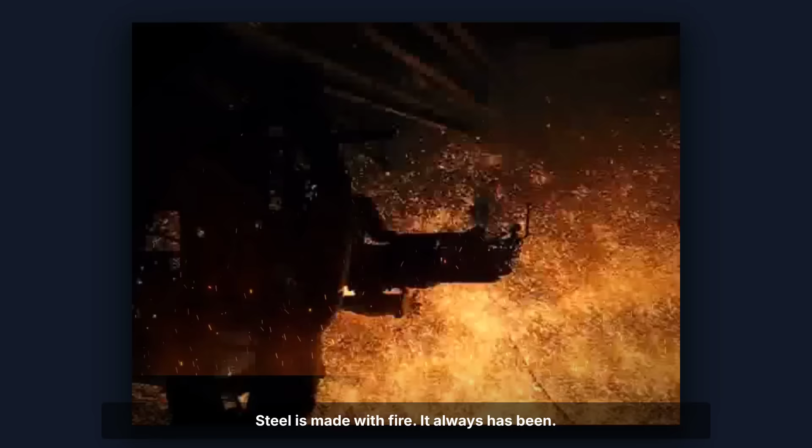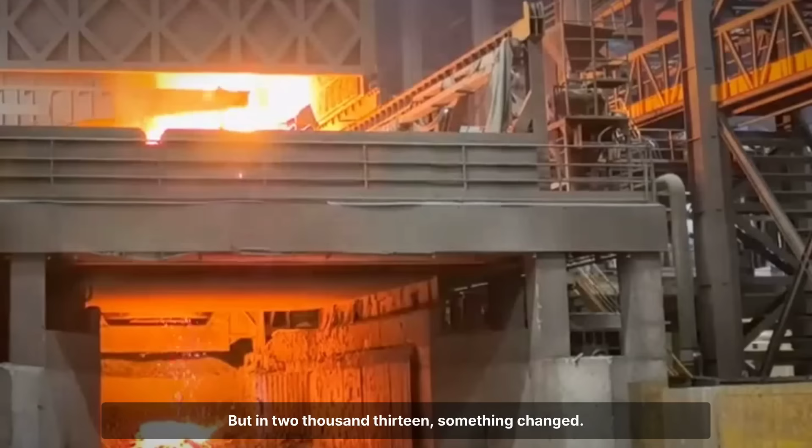Steel is made with fire. It always has been. Fire so hot it liquefies rock. It produces more carbon dioxide than almost every country on Earth. Only China and the United States emit more. But in 2013, something changed. We figured out how to make steel without fire.

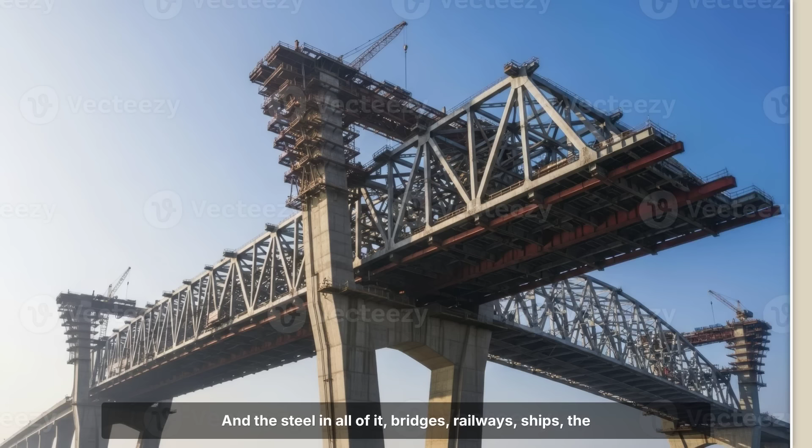Your phone was designed by algorithms. Your car was assembled by robots. The satellite that tells you where you are was launched on explosions calculated to 17 decimal places. And the steel in all of it, bridges, railways, ships, the rebar inside every building, was made the same way it was made in 1300.

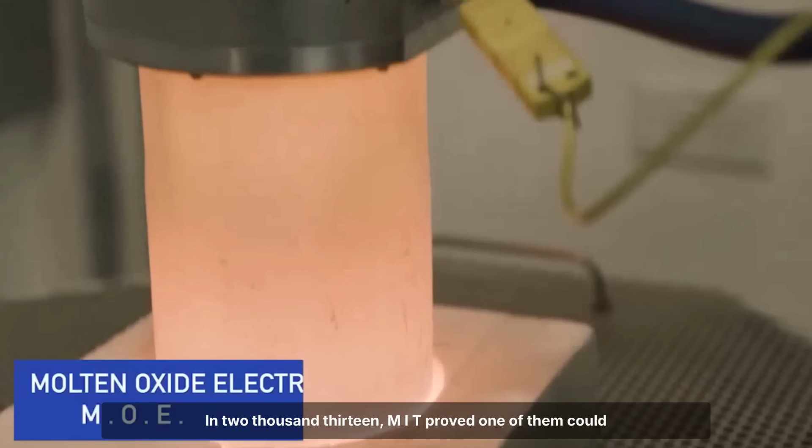Researchers had theorized an alternative for decades. In 2013, MIT proved one of them could actually work. And you've probably never heard of it. You just need electricity. That's it. But to understand why that's such a big deal, you need to understand what electricity is actually replacing.

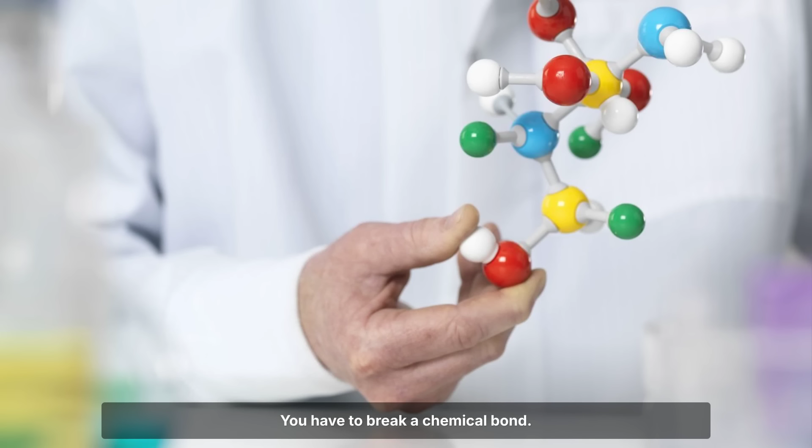This is iron ore. It looks like rock because it is rock. Reddish, heavy, dull. The iron inside is not buried in there like a coin in a jar. It is chemically bonded to oxygen. Iron and oxygen are locked together so completely that you cannot dig it up and melt it. You have to break a chemical bond. You have to divorce the iron from the oxygen. And that divorce is what has defined metallurgy for 3,000 years.

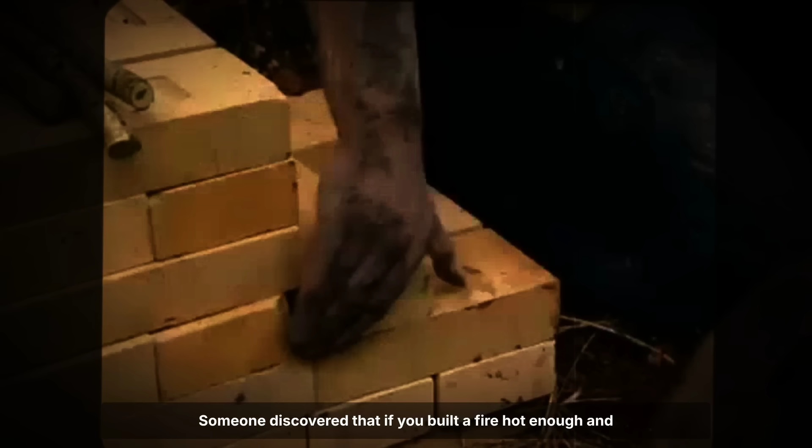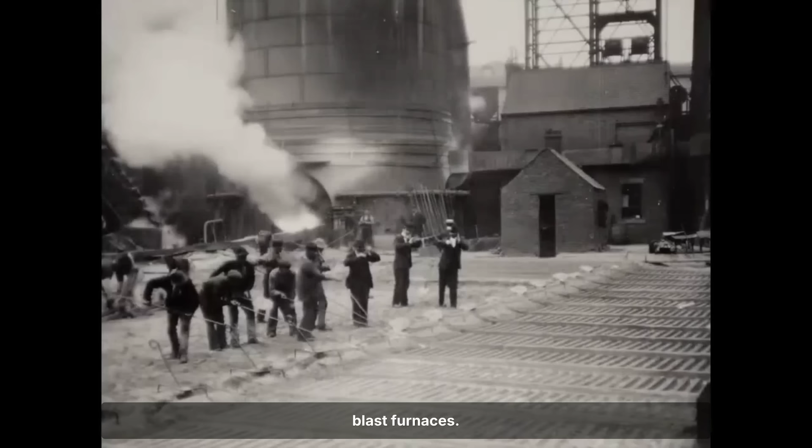Someone discovered that if you built a fire hot enough and packed the right kind of rock around it, something remarkable happened. Metal appeared, liquid, glowing, heavy, pooling at the bottom of the fire pit. Medieval craftsmen scaled the early furnace into the first blast furnaces. The Industrial Revolution multiplied them across continents, but the fundamental transaction never changed.

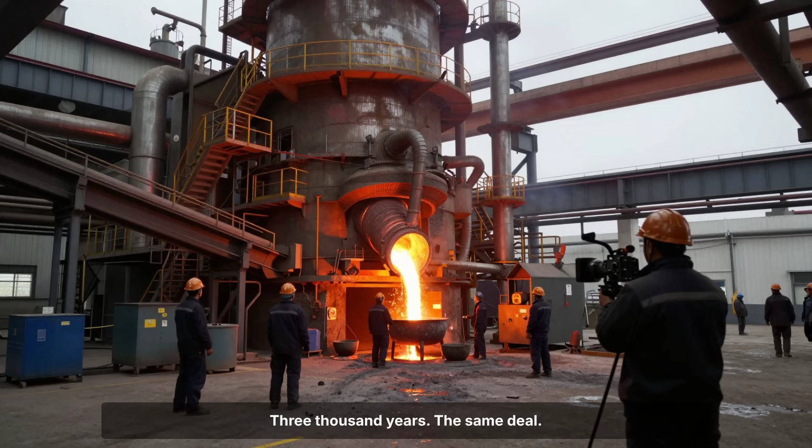You give fire carbon. Carbon steals oxygen from the ore. You get metal. You get carbon dioxide. Every sword, every bridge, every railway, every skyscraper. 3,000 years, the same deal. Nobody questioned whether it was necessary. Nobody had proven a way around it.

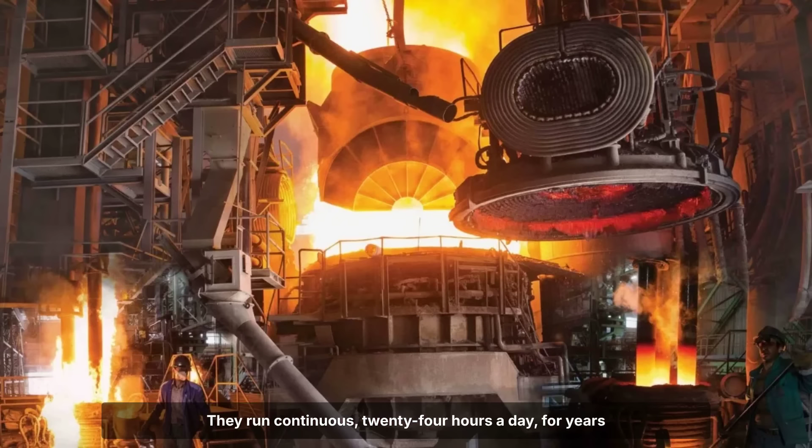The modern version is the blast furnace, 12, 15, sometimes 20 stories tall. They run continuously 24 hours a day for years without stopping. You cannot turn them off. The thermal mass alone would crack the structure. Some have been burning without interruption for over a decade.

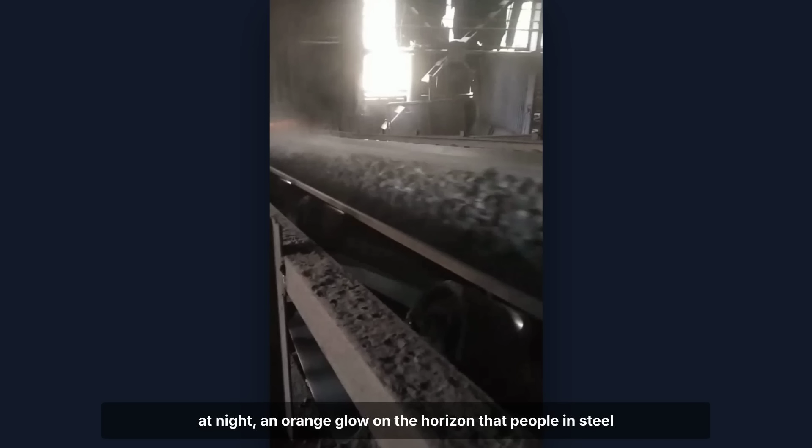The heat inside is so intense it is visible from miles away at night. An orange glow on the horizon that people in steel towns have lived beside their entire lives without thinking much about what it means. Iron ore goes in the top. Coke, which is coal stripped down to a near pure carbon skeleton, goes in with it. Air blasted in at nearly 1,200 degrees Celsius ignites the coke.

It releases carbon monoxide, which rises and reacts with the iron oxide. The oxygen gets stripped away, liquid metal falls to the bottom, carbon dioxide rises out of the top, millions of tons of it per plant, per year.

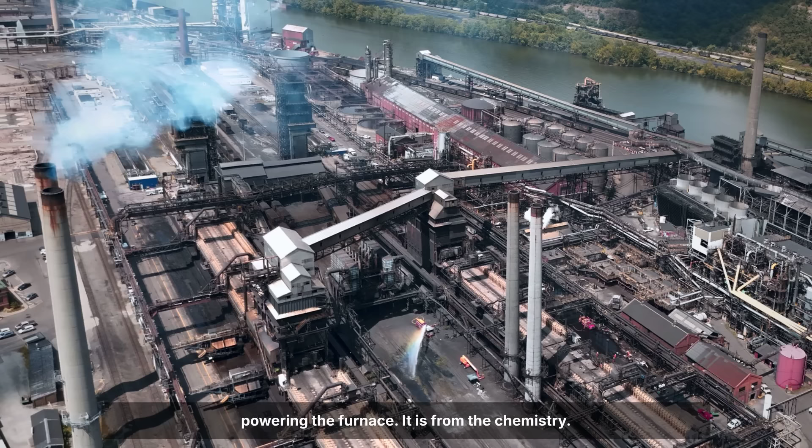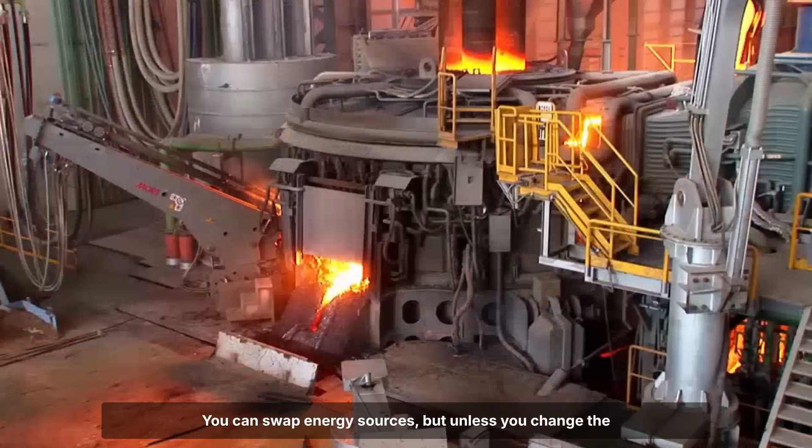Here is what matters: that carbon dioxide is not from powering the furnace, it is from the chemistry. Carbon is not just the fuel, it is the reactant. Without carbon, the oxygen goes nowhere, the metal stays locked in the rock. You can swap energy sources, but unless you change the reaction itself, the carbon dioxide problem stays.

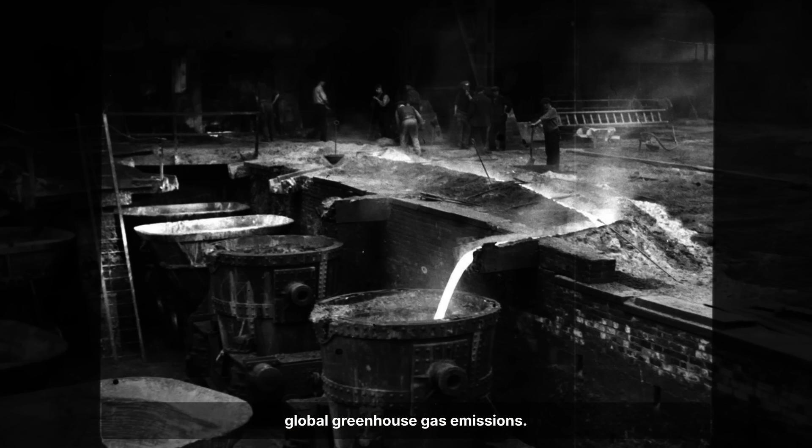The steel industry produced 1.9 billion tons of steel in 2024. Making it generated around 4.1 billion tons of carbon dioxide equivalent, roughly 7 to 8% of global greenhouse gas emissions. For 200 years, we assumed that was just the price of metal. That assumption rested on something nobody stopped to question.

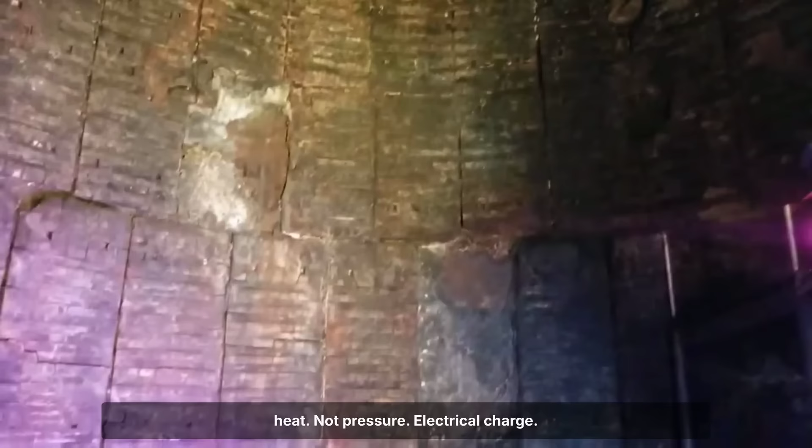What is actually holding the iron and oxygen together? Not heat, not pressure. Electrical charge. At its core, this is not a heat problem, it is a bond problem. Iron oxide is held together by electromagnetic attraction. The iron atoms carry a positive charge, the oxygen atoms carry a negative charge.

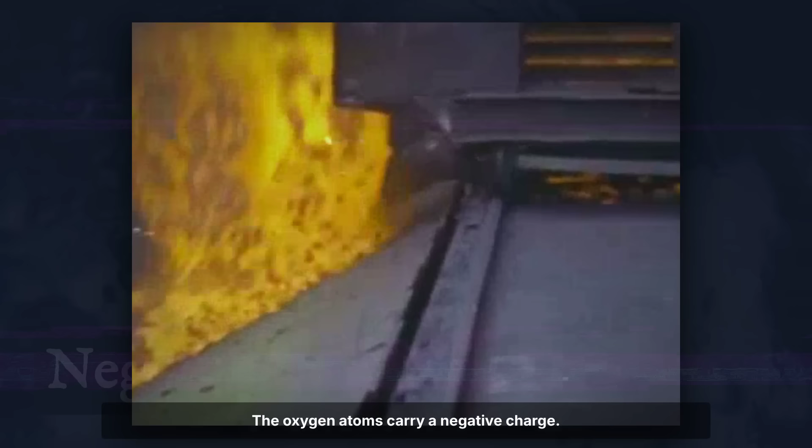When you run a blast furnace, you're using carbon monoxide as a chemical crowbar, a molecule so hungry for oxygen that it steals oxygen away from the iron. That works. It has always worked. But it produces carbon dioxide when the crowbar does the job.

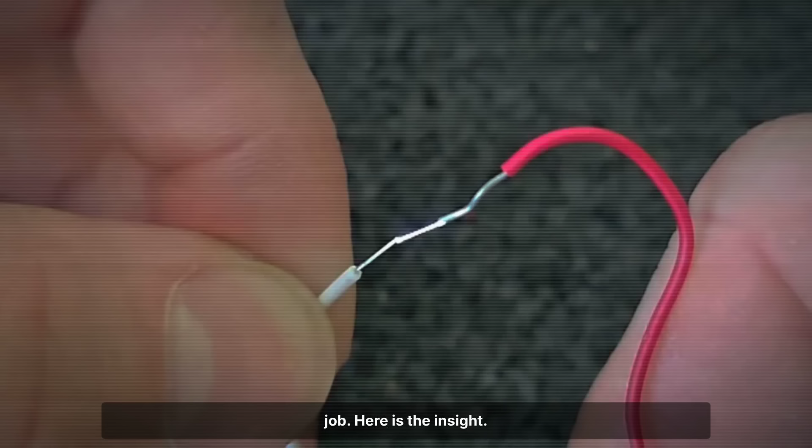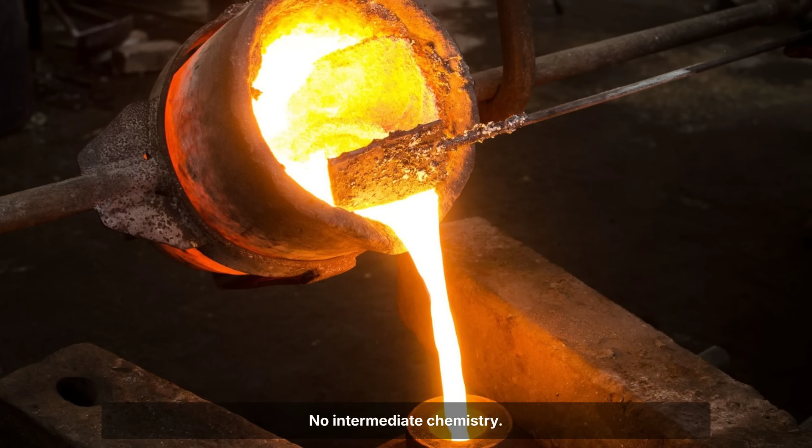Here is the insight. If the bond is electrical, you do not need a chemical crowbar. You can use electricity directly. Apply a current and the charged particles move on their own. Oxygen goes one way, iron goes the other, no intermediate chemistry, no carbon dioxide.

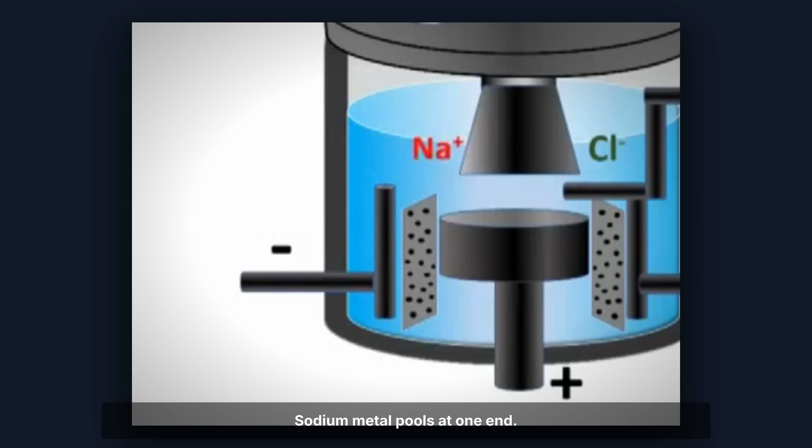Here is an analogy. Take ordinary table salt, sodium and chlorine locked together. Melt it, drop 2 electrodes in, run a current and the bond breaks. Sodium metal pools at one end, chlorine gas bubbles off the other. Not because you added a chemical, but because you applied electricity to something held together by electrical attraction. This is not hypothetical, it is how sodium metal has been produced industrially for over a century.

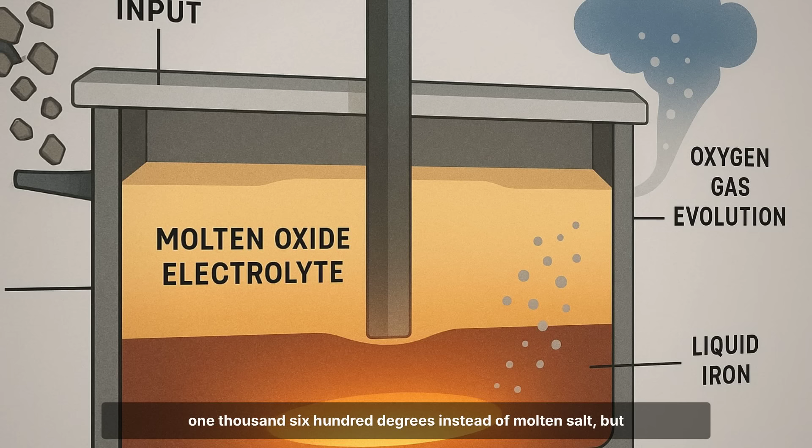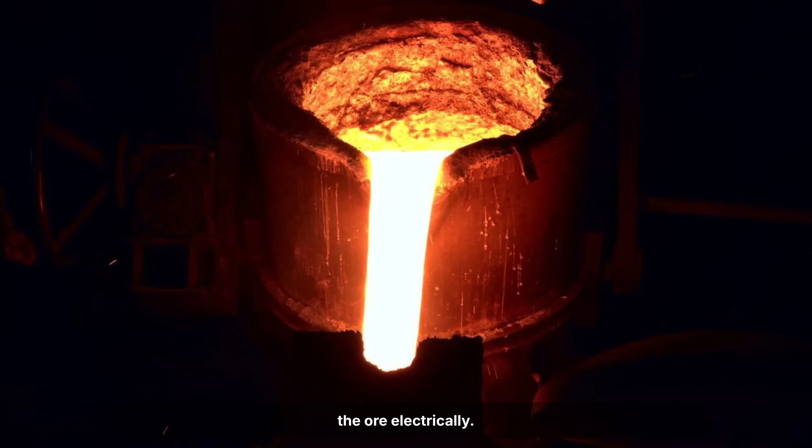That is electrolysis. The environment for iron is far more extreme. Liquid rock at 1,600 degrees instead of molten salt, but the logic is identical. In 2013, MIT proved it works on iron oxide. The process is called molten oxide electrolysis. You melt the ore electrically, it becomes a liquid mineral soup, extremely hot, extremely reactive, electrically conductive. You run a direct current through it.

The positive electrode draws the oxygen out, it bubbles off the surface as pure oxygen gas, visible, physical, gone. Watch it happen in the lab and it looks almost unremarkable. Small bubbles rising through glowing liquid. No roar, no flame, no column of exhaust climbing into the sky, just bubbles.

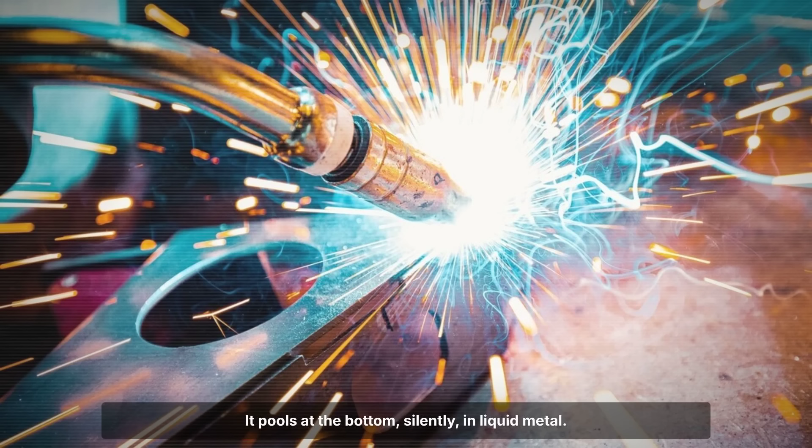The negative electrode draws the iron. It pools at the bottom silently in liquid metal. The heat comes from the electricity itself. The current that splits the bond also heats the melt. No combustion required. In a blast furnace, ore goes in, metal comes out, carbon dioxide goes into the atmosphere.

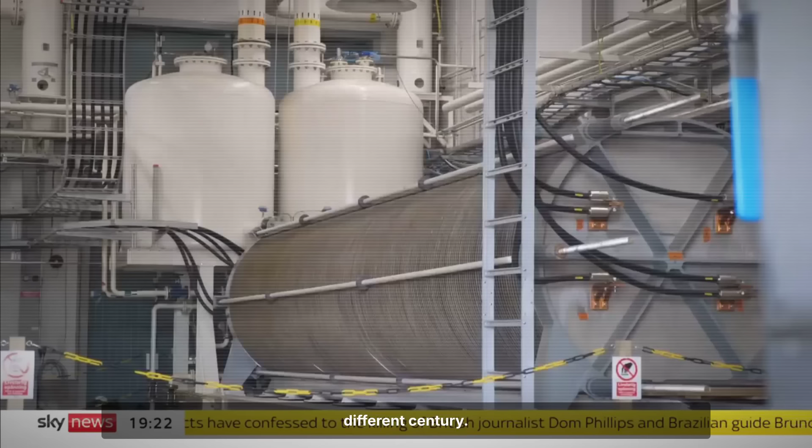In molten oxide electrolysis, ore goes in, metal comes out, oxygen goes into the atmosphere. A different byproduct, a different century. Hydrogen-based reduction is also being pursued, and it is currently ahead commercially, with plants already delivering hydrogen-reduced steel to manufacturers.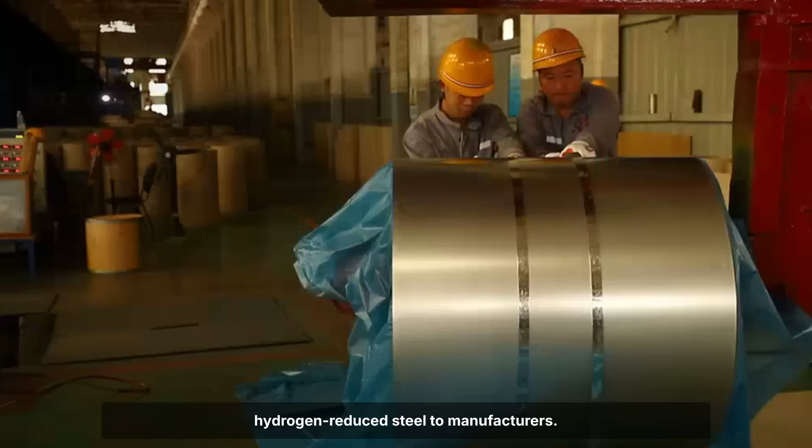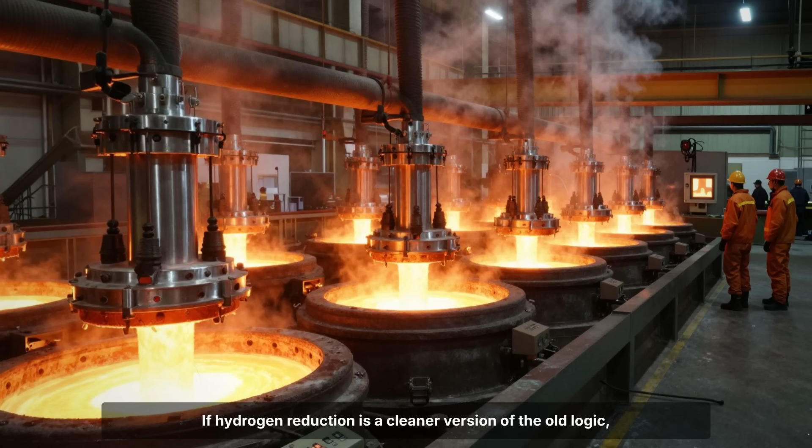But hydrogen still uses chemistry to remove oxygen. Molten oxide electrolysis skips chemistry entirely. If hydrogen reduction is a cleaner version of the old logic, molten oxide electrolysis is a different logic altogether. To understand how we got here, you need to know about Donald Sadoway. Sadoway is a materials scientist at MIT.

He spent roughly 16 years teaching the university's introductory solid-state chemistry course, hundreds of students at a time and eventually over half the freshman class in a single section. Bill Gates came across the lectures through the MIT OpenCourseWare initiative and emailed Sadoway directly to ask for a meeting and to discuss the research. Sadoway initially ignored the message, assuming his account had been hacked by pranksters at MIT. It was not. Gates called his lectures the best chemistry lessons anywhere, but teaching was not the work.

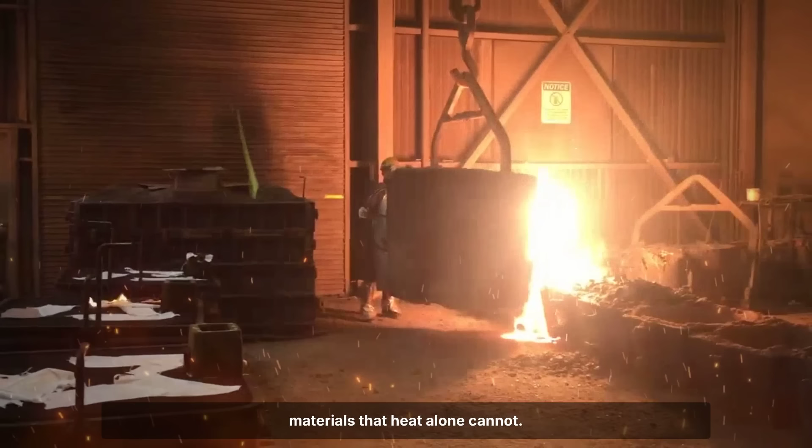The work was electrochemistry, what electricity can do to materials that heat alone cannot. His earlier research focused on liquid metal batteries, grid-scale energy storage built from layers of molten metal and salt. That work gave him an intuition most metallurgists did not have, that separating metals from their ores was fundamentally an electrochemical problem, not a thermal one. The insight sounds simple in hindsight.

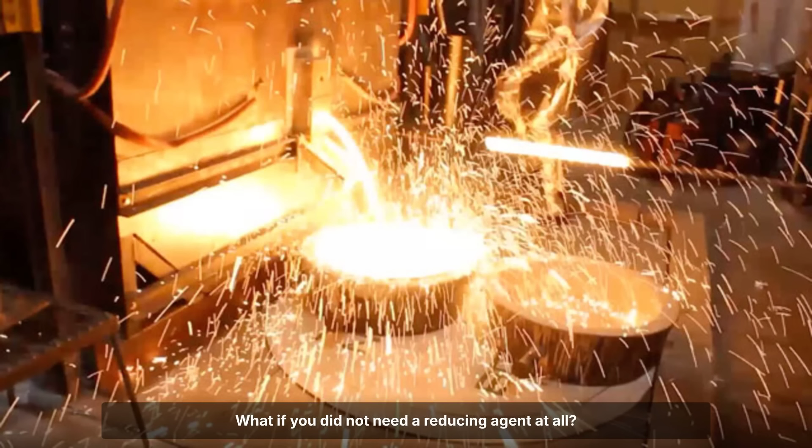It was not. For a century, the assumption in steelmaking research was that decarbonizing the process meant finding a cleaner source of heat or a cleaner reducing agent. Sadoway's group asked a different question. What if you did not need a reducing agent at all? That question led to years of work on a problem that sounds deceptively simple. What do you make the electrodes out of?

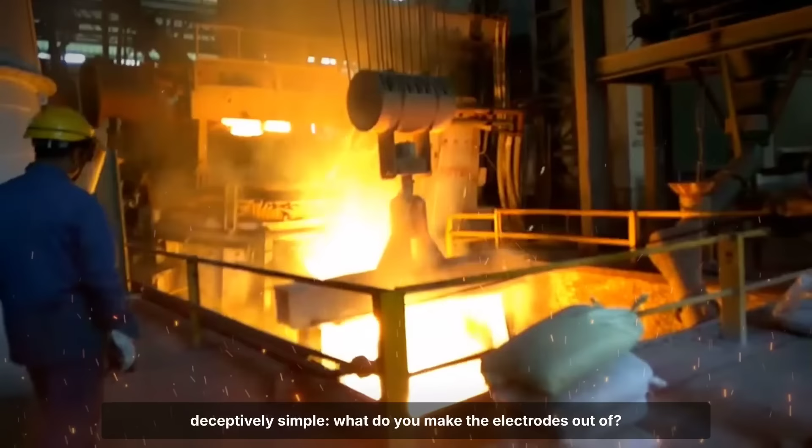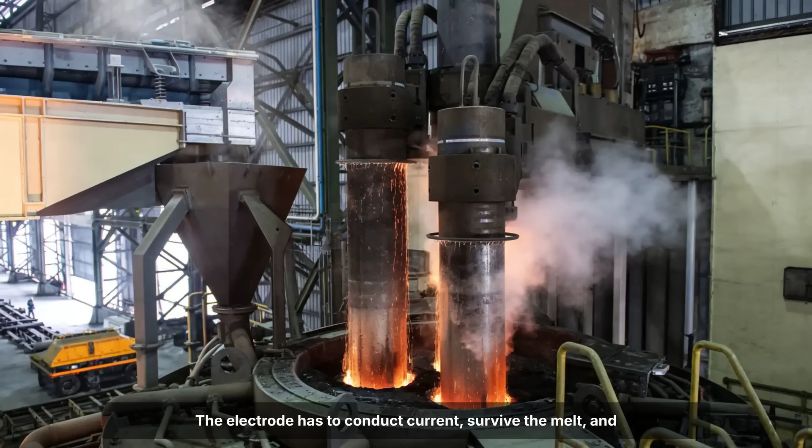At 1,600 degrees, submerged in liquid rock, almost every material dissolves. Steel corrodes, platinum corrodes, graphite oxidizes. The electrode has to conduct current, survive the melt, and not contaminate the metal pooling below it, simultaneously and indefinitely. Earlier work had shown that iridium could do it.

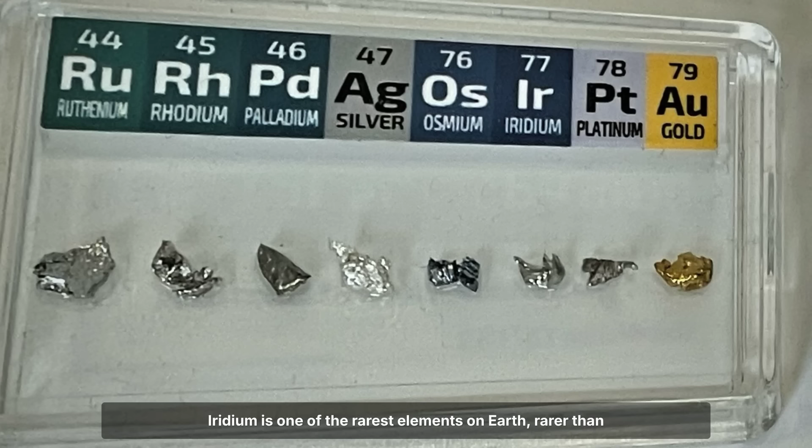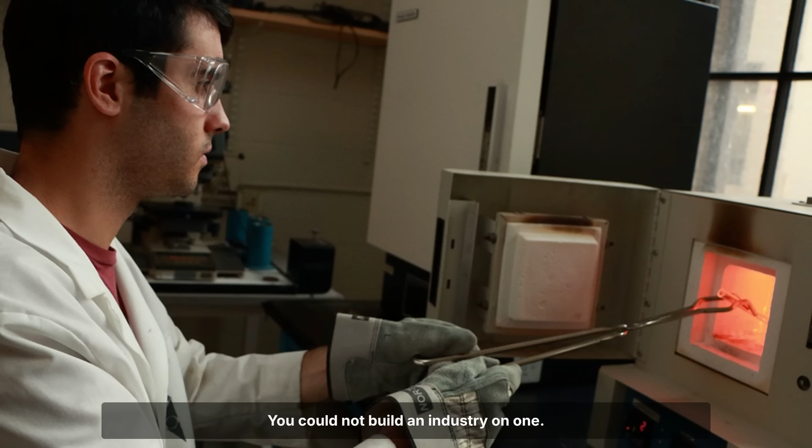Iridium is one of the rarest elements on Earth, rarer than platinum, produced as a byproduct of mining South African platinum ore, extracted in quantities measured in tons per year globally. You could build an iridium anode. You could not build an industry on one. The 2013 Nature paper solved the harder problem.

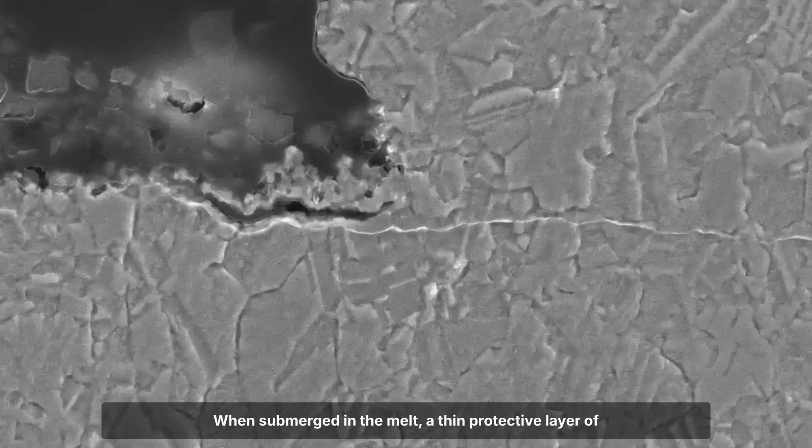Sadoway's group found that a chromium-based alloy, cheap and abundant and the kind of material used in stainless steel, could survive the conditions of iron oxide electrolysis. When submerged in the melt, a thin protective layer of chromium and aluminum oxide forms spontaneously on its surface. Thick enough to resist the environment, thin enough for current to pass through. The alloy essentially shields itself.

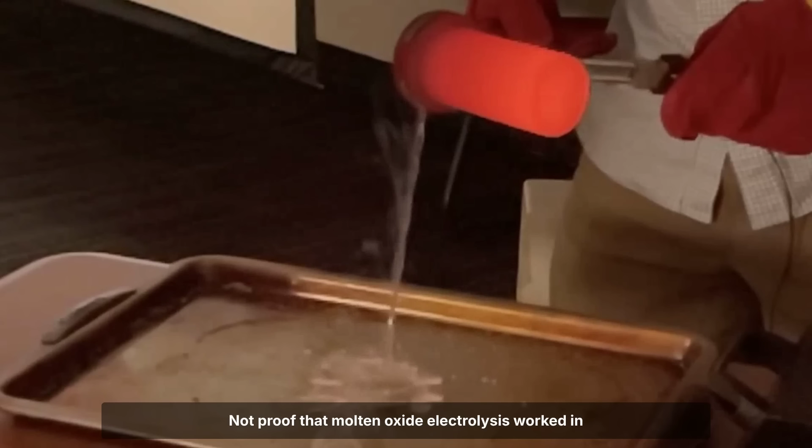That was the breakthrough. Not proof that molten oxide electrolysis worked in principle. Proof that it could be built from materials that actually exist in the world in sufficient quantity. Boston Metal had been founded the year before, in 2012, spun directly out of Sadoway's lab. The technology at that point existed at the scale of a coffee cup, a few grams of metal, a proof of concept.

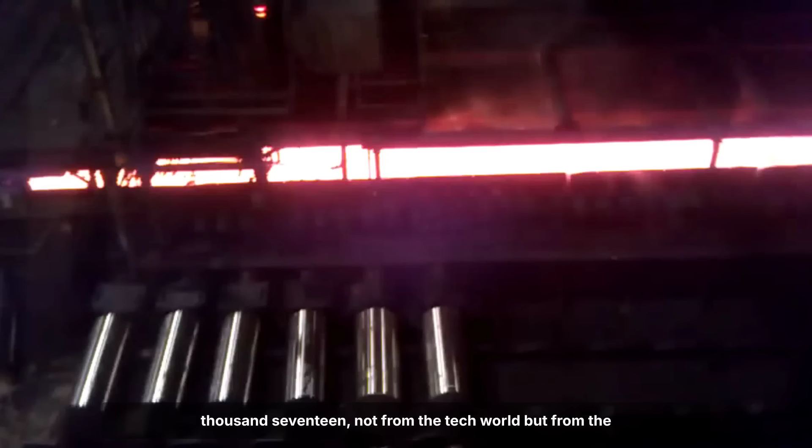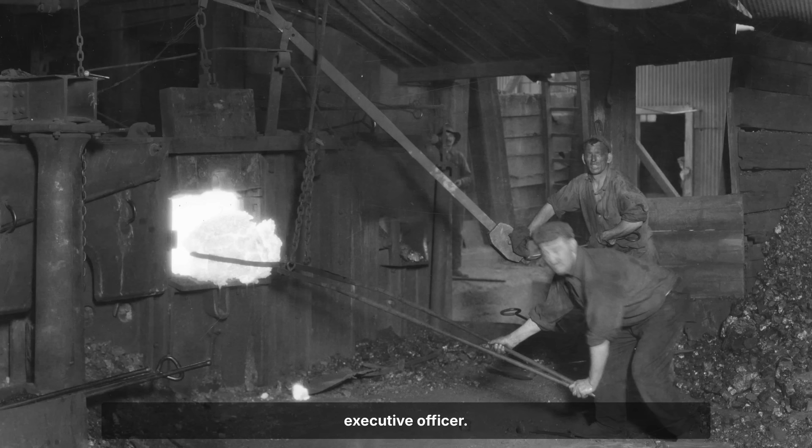Tadeu Carneiro joined as Chief Executive Officer in 2017, not from the tech world, but from the steel industry itself. He had spent nearly 3 decades at CBMM, the world's largest producer of niobium, a decade of that as its Chief Executive Officer. He understood the industry's conservatism, its deep resistance to change, and exactly why it needed to change anyway.

Under Carneiro, Boston Metal raised over $420 million. ArcelorMittal, one of the world's largest steelmakers, invested. So did Vale, the Brazilian mining giant. When the people who run the incumbent industry bet on its own disruption, that is a signal worth paying attention to.

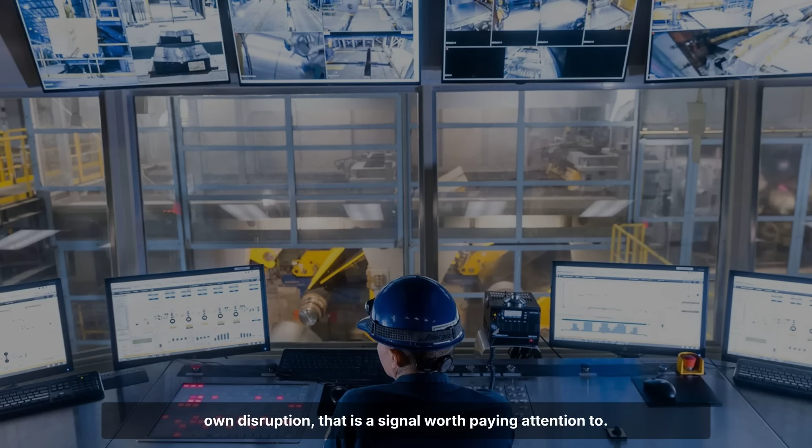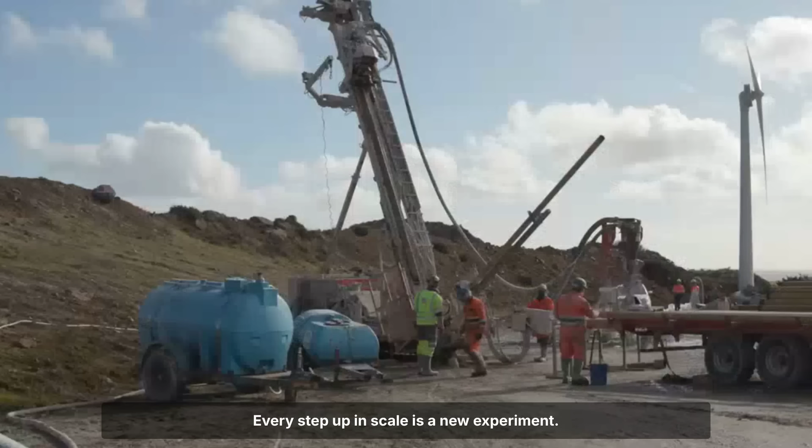The engineering work proceeded in stages: semi-industrial cell in 2014, then years of anode testing, refractory development, current density optimization. Every step up in scale is a new experiment. The melt behaves differently than the models predict. The anode degrades in unexpected ways.

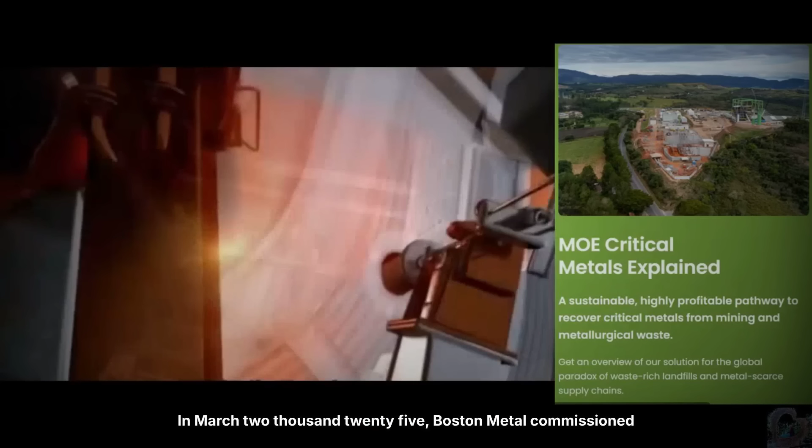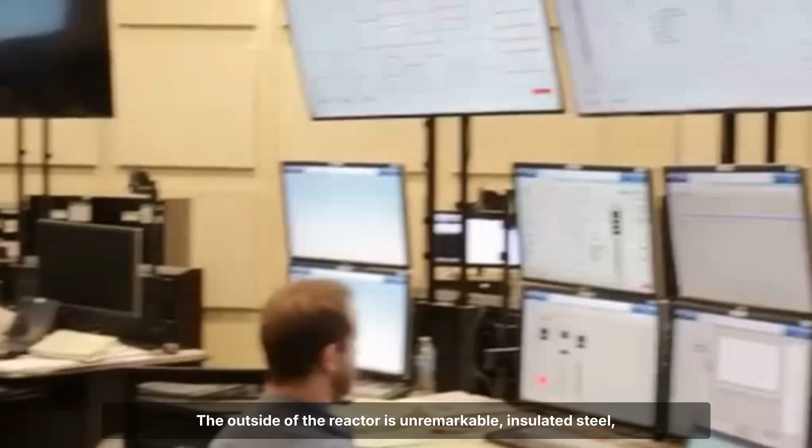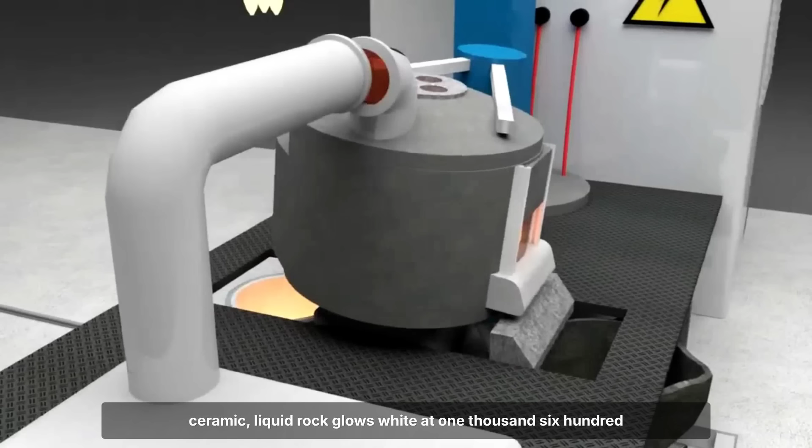Every failure was data. In March 2025, Boston Metal commissioned a multi-inert anode industrial cell at its facility in Woburn, Massachusetts. The outside of the reactor is unremarkable: insulated steel, heavy cable runs, instrumentation panels. Inside, behind refractory walls built from magnesium oxide ceramic, liquid rock glows white at 1,600 degrees Celsius.

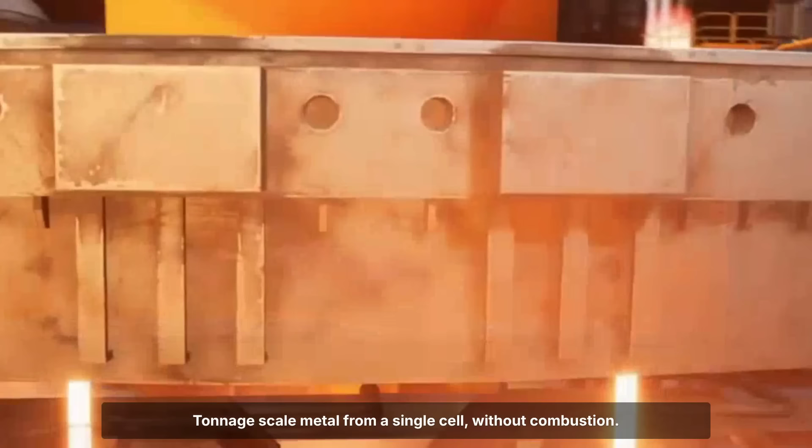No flame, no exhaust stack, no smoke, just a low electrical roar, and at the bottom of the cell, pooling slowly, silently, liquid iron. Tonnage scale metal from a single cell without combustion. That is not a commercial plant. It is not displacing a blast furnace. But it is proof that the anode survives, that the cell runs continuously, that the output is real.

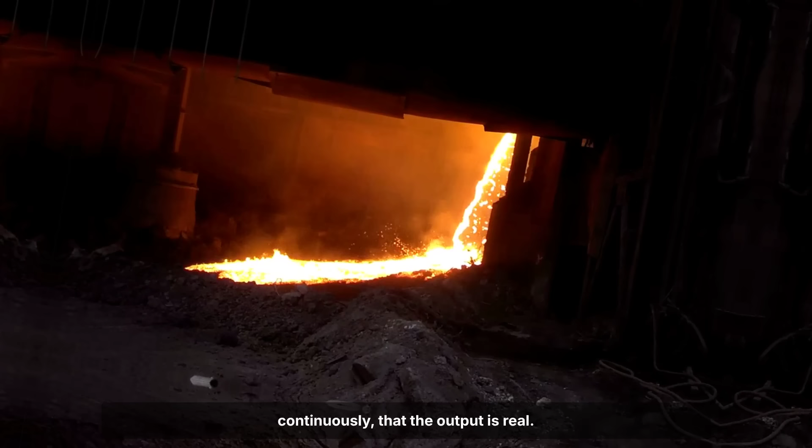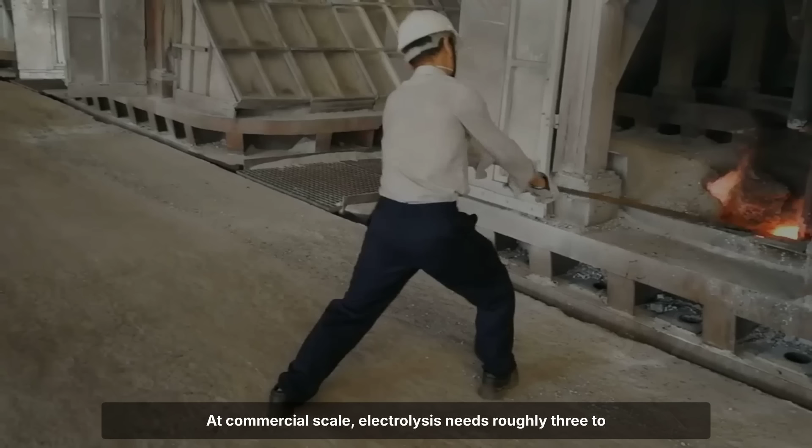The question now is whether the next step can happen fast enough to matter. 3 barriers stand between here and there. They are not equal. Power. At commercial scale, electrolysis needs roughly 3 to 5 megawatt hours per ton. Scaled across 1.9 billion tons a year, the total electricity demand would be several times the combined annual consumption of every country in Europe. The process is only as clean as the grid it runs on. The grid is not there yet.

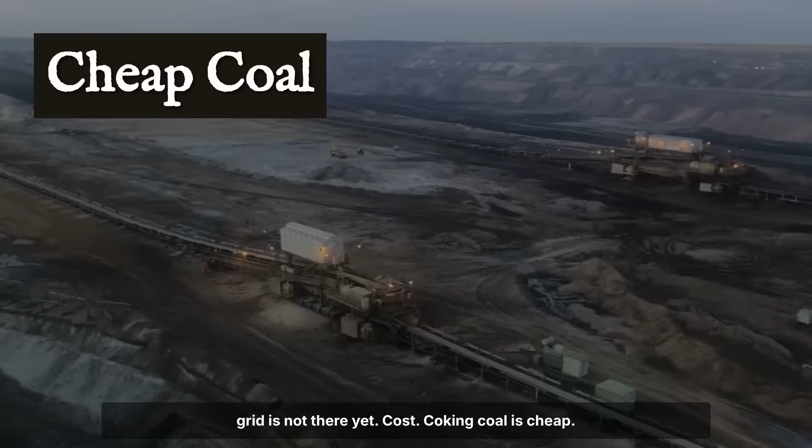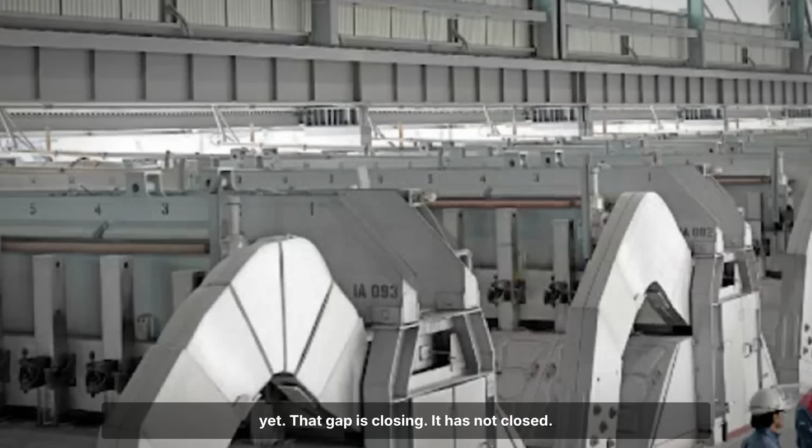Cost. Coking coal is cheap. The blast furnaces running today were built decades ago, their capital costs long since paid off. Electrolysis cells are expensive to build. The refractory linings degrade, and the cost per ton is not competitive yet. That gap is closing. It has not closed. Both of those are engineering problems. Solvable, given time and investment.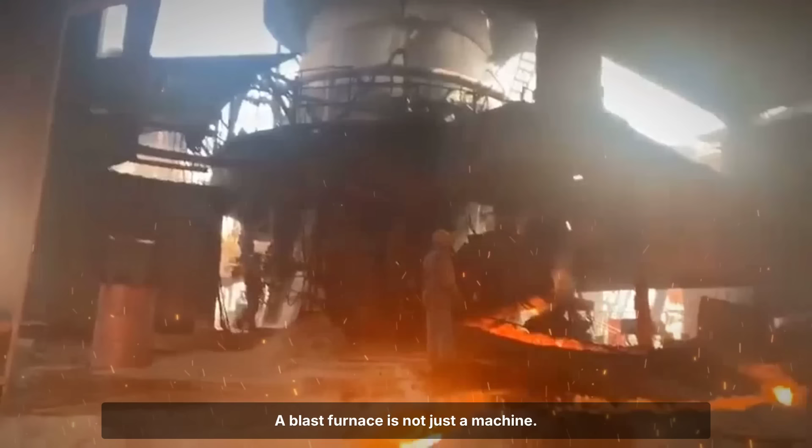The third barrier is different in kind. A blast furnace is not just a machine. It is the centre of gravity for everything built around it: coal mines, coking plants, rail lines, port infrastructure, and generations of workers. In Linz, Austria, Voestalpine built its first blast furnaces in the early 1940s, rebuilt them after the war, and has been running them ever since.

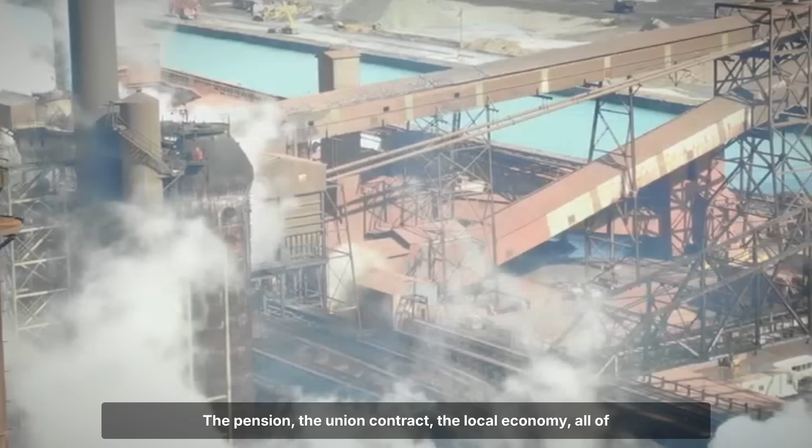In Duisburg, Germany, ThyssenKrupp's steel operations are the economic foundation of a region. In Gary, Indiana, and Pittsburgh, Pennsylvania, generations of families built their lives around the rhythms of the furnace. These workers did not design the system they work in. They showed up to jobs that were already there. The pension, the union contract, the local economy, all of it organised around the assumption that the furnace keeps running. Asking them to transition is not swapping one machine for another. It is pulling the floor out while people are standing on it.

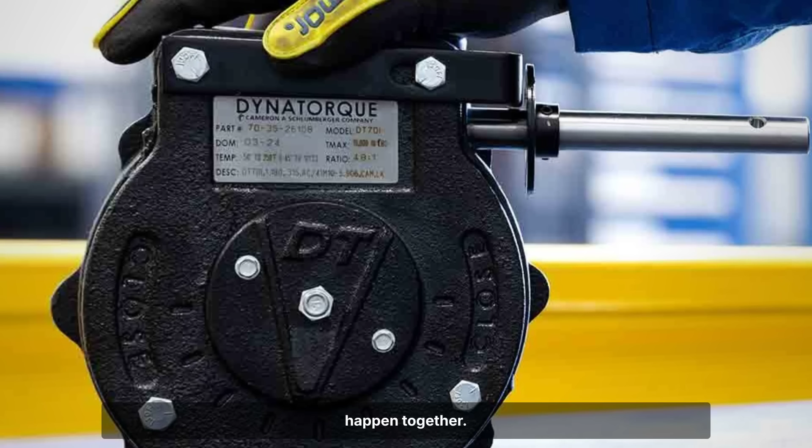There is no clean answer here. Move too fast and you devastate communities. Move too slow and you lose the climate. The technology transition and the human transition have to happen together. One without the other fails. And every year that takes, billions more tons of carbon dioxide go into the atmosphere. The pressure is building from the outside.

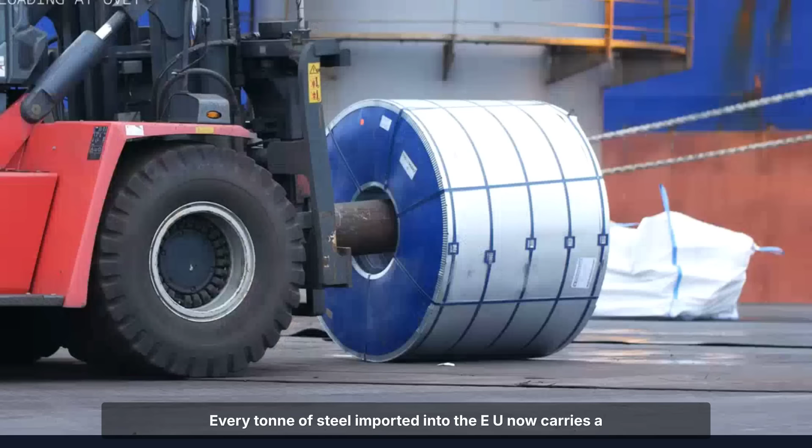Europe moved first. On January 1st, 2026, the EU Carbon Border Adjustment Mechanism entered its definitive phase. The first time in history that a carbon price has been enforced at a border. Every ton of steel imported into the EU now carries a cost tied directly to its emissions intensity. Countries that built their steel industries on coal are watching that choice become a trade penalty in every market that follows Europe's lead.

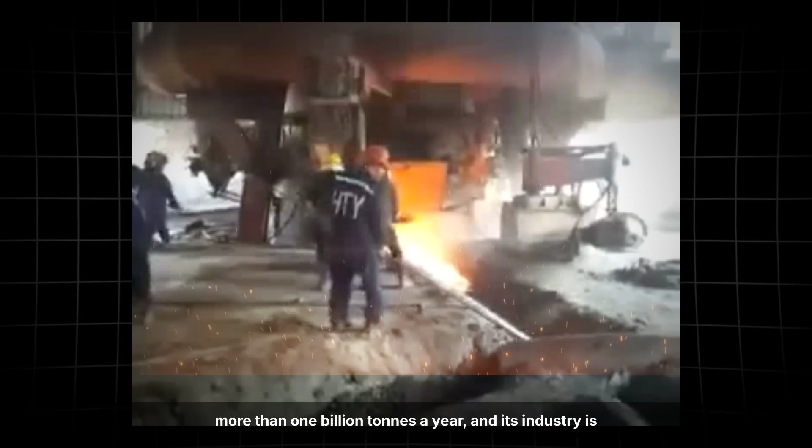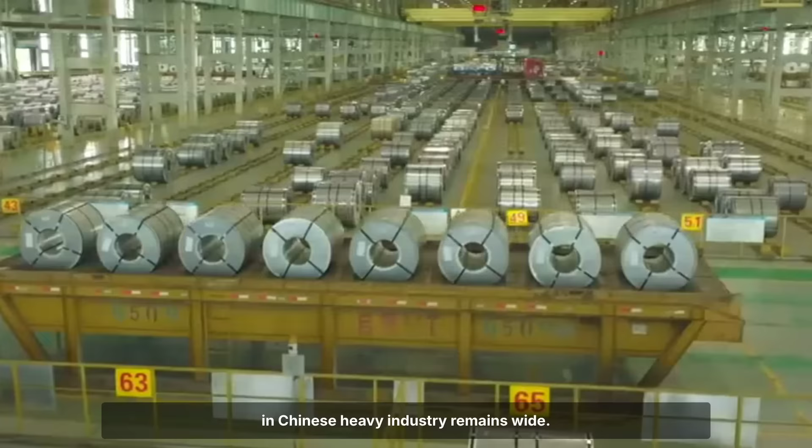China is the central question. It produces roughly 55% of the world's steel, more than 1 billion tons a year, and its industry is overwhelmingly blast furnace based, overwhelmingly coal dependent. China has set a carbon neutrality target of 2060 and has announced its own emissions trading system. But the gap between declared targets and operational reality in Chinese heavy industry remains wide. What China does with its steel industry over the next decade will matter more for the global climate than what any other country does. It is not a supporting character in this story, it is the main variable.

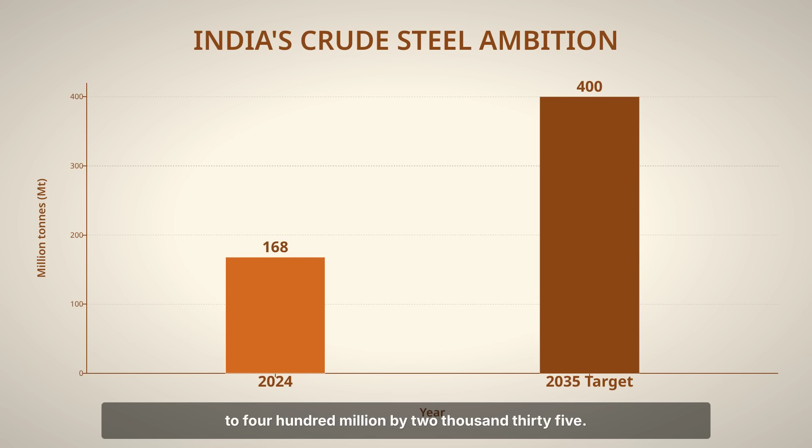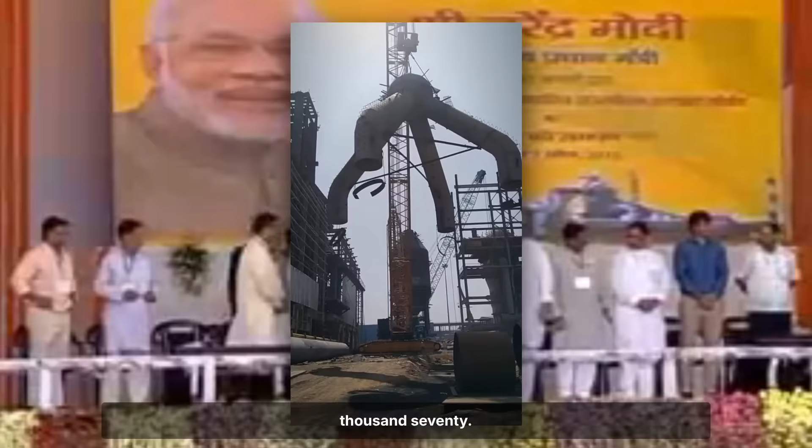The decision that may matter most right now, however, is happening in India. A draft of India's national steel policy, reviewed in April 2026, lays out a plan to expand crude steel capacity from 168 million tonnes to 400 million by 2035. Plants are being designed right now. Emissions profiles are being locked in for decades. A blast furnace commissioned this year runs until 2070. Whatever India builds at this moment, it builds for half a century.

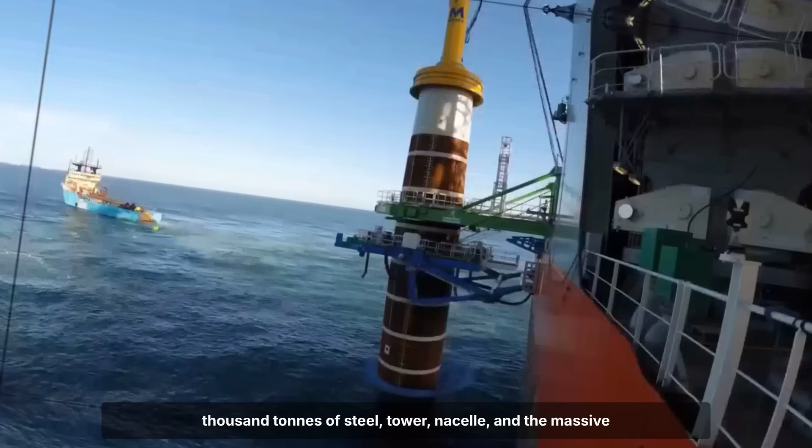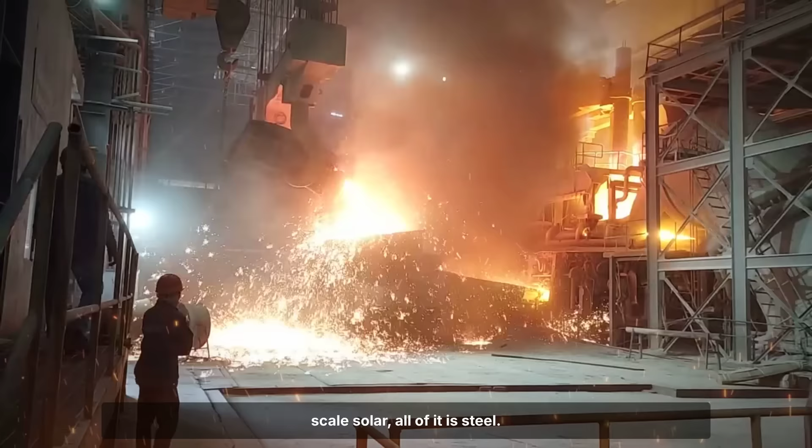Here is what is actually at stake. A single large offshore wind turbine requires around 3,000 tonnes of steel, tower, nacelle and the massive foundation driven into the seabed. The transmission towers carrying power across continents, the frames of electric vehicles, the racking of utility-scale solar, all of it is steel. The physical skeleton of the clean energy transition is made of the same material that has always been made with fire, and making it is one of the largest sources of CO2 on the planet. Whoever learns to produce it without carbon, at scale, at cost, does not just win a trade advantage. They become the foundry of the energy transition itself.

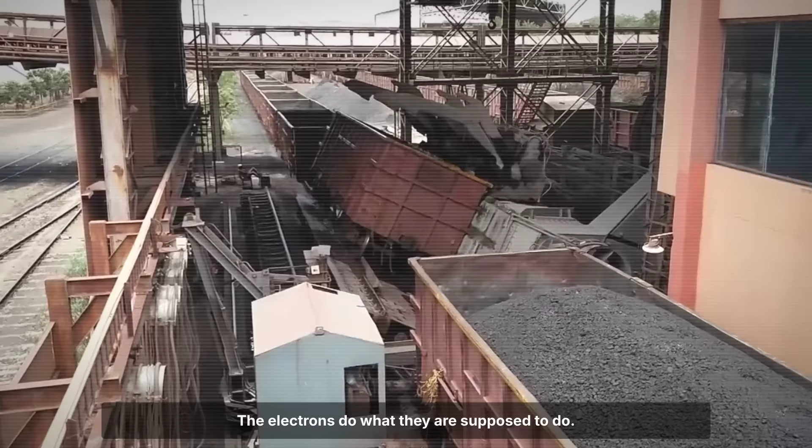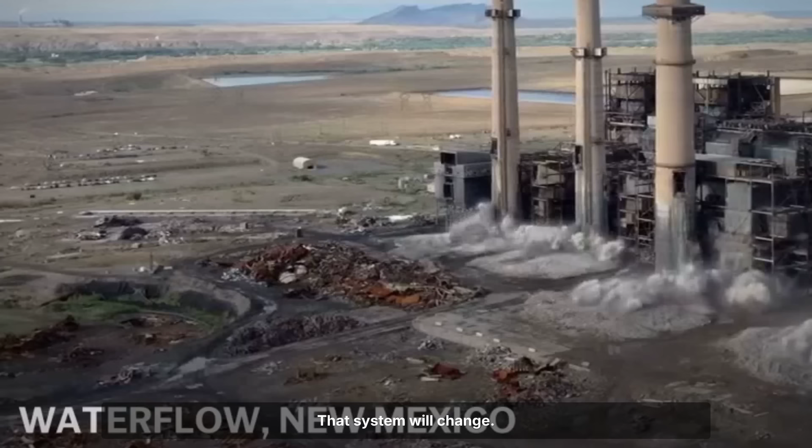The limitation is not the technology. The electrons do what they are supposed to do. The limitation is the system built around coal, institutions, supply chains, trade relationships and political dependencies, so entrenched that changing them is not a technical problem. It is a structural one. That system will change. Carbon pricing is accelerating it. Procurement policy is pulling it. The economics are closing in from every direction. But it will not change on its own, and it will not change overnight.

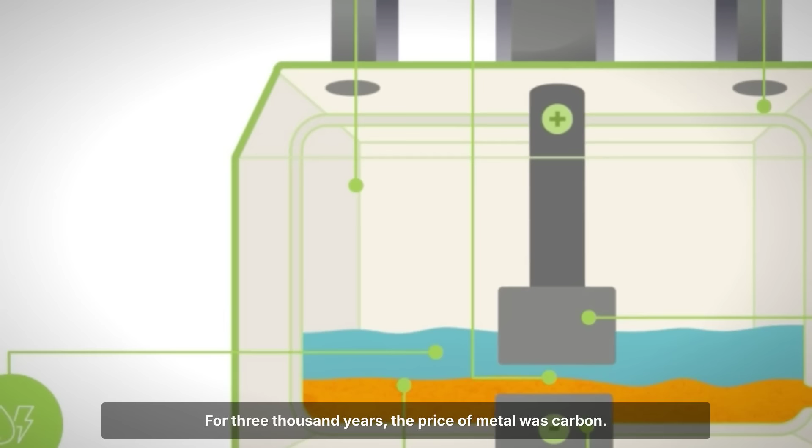For 3,000 years, the price of metal was carbon. We just found out it does not have to be. Now comes the harder part, making a civilization catch up to what a laboratory already knows.